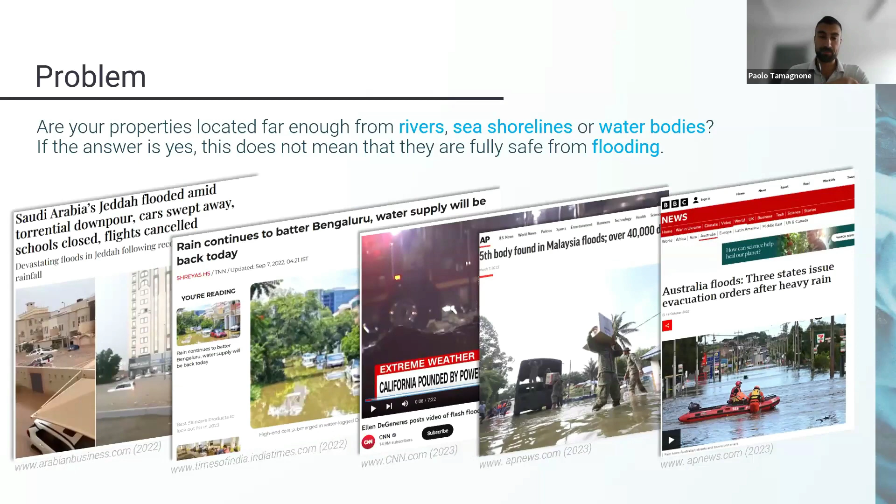I will start by presenting the first studies that we developed during a research project in Italy, where in order to investigate the impact of these meteorological extremes on the UNESCO Cultural Heritage City of Florence, the University of Florence started a project called Talete, that had the aim of protecting the cultural heritage preserved in the district of Santa Croce.

And as you probably know, the historical city center of Florence, and especially the Santa Croce district, contains two of the most important cultural heritage sites in Italy, meaning the Santa Croce Cathedral and the National Central Library of Florence, which is one of the biggest national central libraries in Europe.

But looking at the geographical location of this area, we can immediately spot that it is dangerously exposed to multiple sources of hazard. First of all, we have river flooding due to the proximity to the Arno River. Indeed, this area was strongly affected by the catastrophic flood that occurred in 1966.

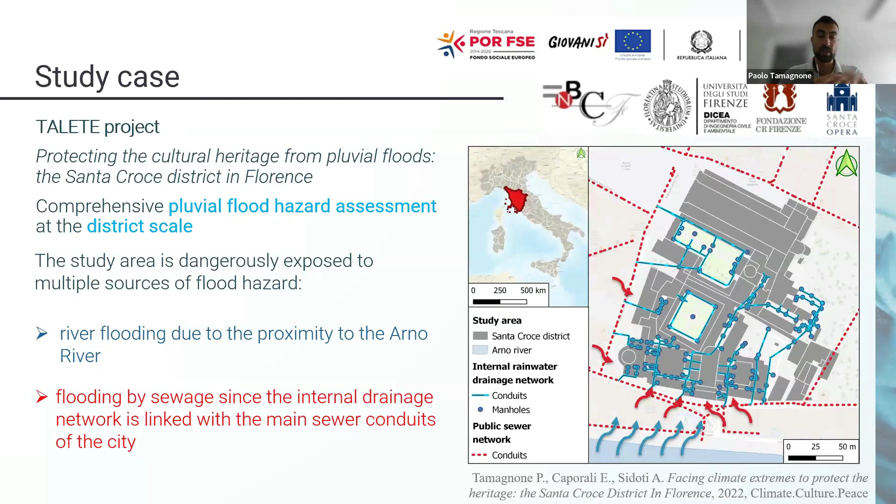And secondly, less obvious, is the hazard that lies beneath the surface, namely the overflowing of the sewer network. Indeed, the internal drainage network of the analyzed complex is directly connected to the urban public sewer system.

In order to study all these phenomena and investigate the hazard related to extreme rainfall, we exploited the potential of InfoWorks ICM, and we developed an ad hoc 1D-2D dual drainage model to provide a comprehensive evaluation of the interaction between, first, the internal drainage network, so the network of pipes draining the two buildings that I mentioned before, the National Central Library and the Monumental Complex of Santa Croce.

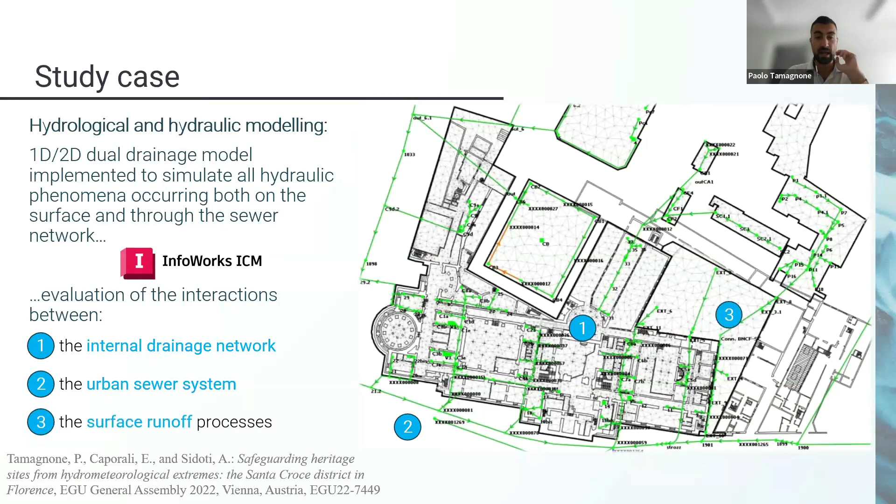Then the urban sewer system, so the public sewer system carrying, in this case, since Florence is an old city, combined water, so black water and rainwater. Considering also the surface runoff processes.

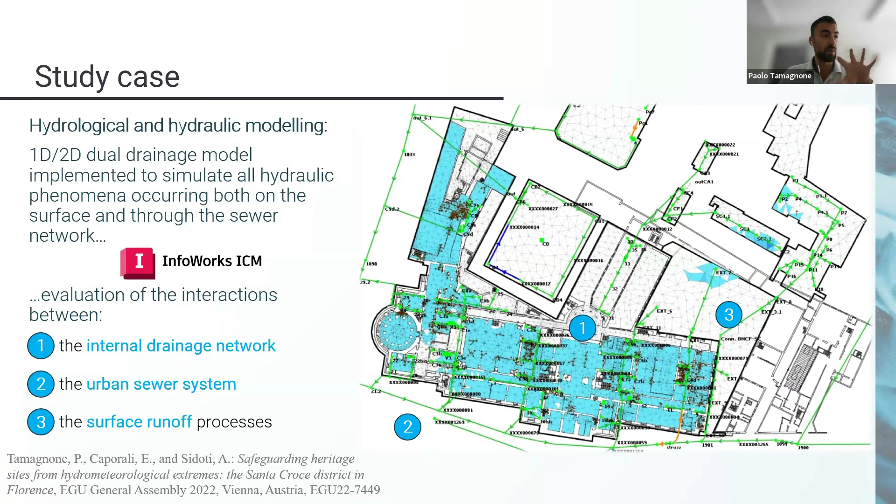So you can see the animation of the hydrodynamic simulation. We used this software to simultaneously calculate the water level and the surcharge condition in the drainage network, while the two-dimensional engine was simulating the flood propagation over the surface. And here, the scale of the analysis was really a micro scale, and we were able to evaluate the flow propagation into the building.

The results of this kind of hydrodynamic analysis have been essential to define all the critical points of the network, recognize the most vulnerable areas and spaces, and investigate the dynamics of a potential inundation, or even, for example, reconstructing what happened during the catastrophic flood of 1966.

So, having all these results and this better understanding of the hydraulic behavior of the drainage system and the topography itself, all this information allows the decision maker to propose, for example, suitable technical solutions, more than sustainable, suitable, because we are speaking about a cultural heritage site, for safeguarding the heritage and all the important assets

contained in this area. And for example, thanks to this kind of approach, we or the decision maker are able to analyze both structural or hard engineering solutions to protect some areas, or also non-structural strategies, for example, for the management of the hydraulic risk led by this pluvial flood.

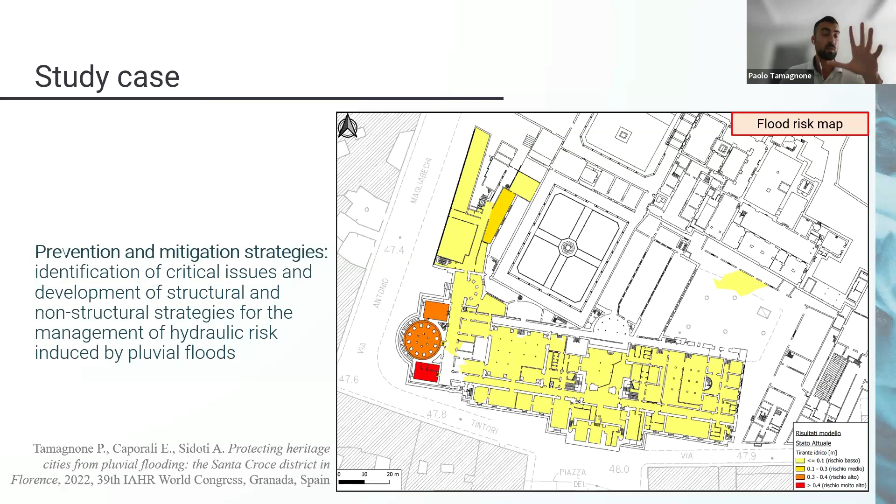So we saw a case study where the scale of the analysis was quite, let's say, small scale. We analyzed one district of one city. But if we want to have a look at what happens at the administration level, authorities, water managers, urban planners, and also engineering offices are usually interested in understanding the hydraulic behavior of their entire territory, because they are managing an entire area.

And they are really interested in knowing the impact of any modification, for example, a new building. They don't want just to know the level of risk or the exposure of that new building, but they want also to know how this new modification will impact the entire system or the entire territory.

So the challenge here can be summarized with this question: how to upscale a comprehensive analysis, in this case a comprehensive flood analysis, without sacrificing quality and precision.

Because usually in hydraulic modeling, when we are analyzing a small scale, we can introduce a lot of details. But when we want to study the problem at the larger scale, we start introducing a lot of hypotheses and simplifications. So what if we want to maintain a high level of precision in our model?

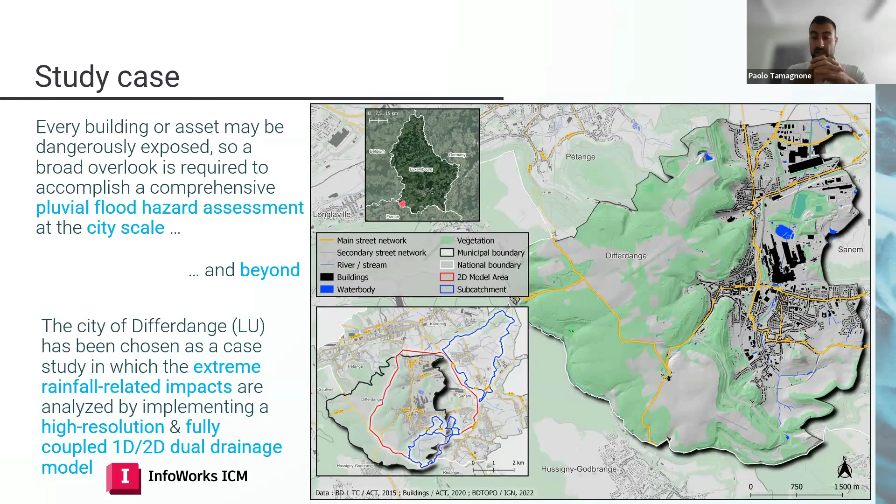But let's go through the data used in our model. We took advantage of the extensive data set of freely available geographical data in Luxembourg. Among them, we used the high resolution digital elevation model, which is publicly available at 50 centimeter resolution. That is a fundamental input to the representation of the surface.

Okay. Another high resolution informative layer is the land cover that is retrieved from the most up-to-date aerial imagery with an accuracy of 20 centimeters. This information especially allows the flood modeler to have an accurate spatial distribution of the important parameters influencing the rainfall-runoff transformation, such as the infiltration and the imperviousness degree through the territory, and also affecting the runoff propagation, meaning the roughness of the surface.

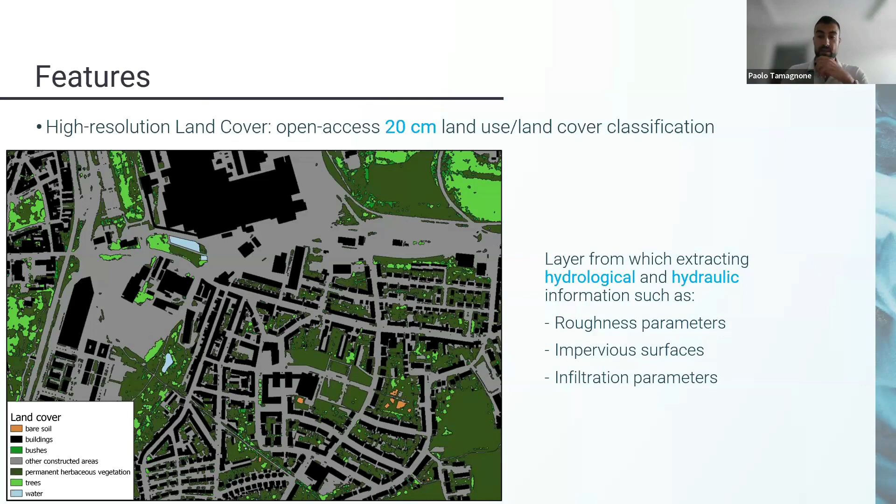Then, in order to take into account all the obstacles present in a complex urban landscape, the most up-to-date cadastral information has been used to shape the computational mesh and better represent the complex topography of the urban scape. As, for example, the footprint of the buildings, the edges of the road where the curbs are, and also we were able to force the mesh using break lines through the rivers and natural changes in the topography.

Then, since we are speaking about a dual drainage model, the essential data is the technical specification of the drainage network. And we were lucky because we got the information from the technical offices of the city, including the location, the size, elevation, material, and all the technical features belonging to the main pipeline of the city. The one that before I was calling urban sewer system.

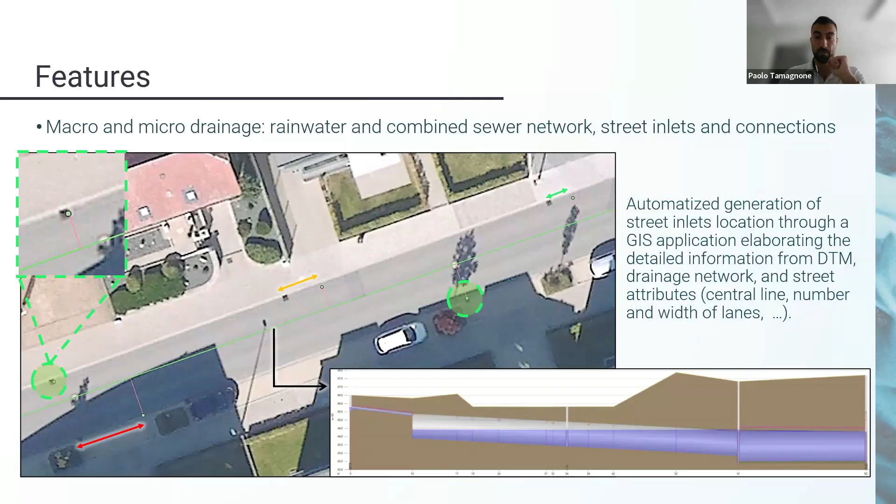So, collecting all this information together into the InfoWorks ICM environment, we built our model of the city of Differdange. And just to give you some figures about our model, we have about 9,000 nodes and pipes representing the drainage network, and about 1.3 million cells that we use to discretize the 35 square kilometers of the surface and the territory analyzed for the city.

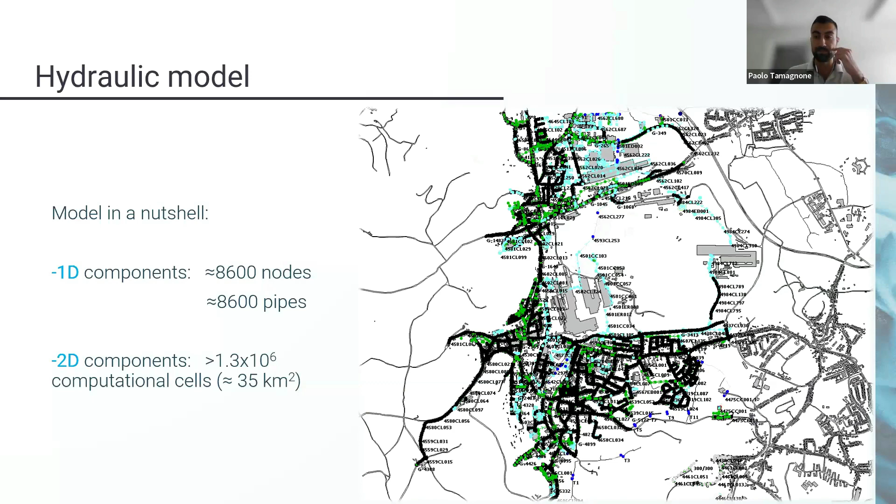Then, as is an important and fundamental step of any hydraulic and hydrological modeling, we had to test the reliability of the model. And to do that, we simulated the extreme event that occurred in June 2021, that generated catastrophic floods in Central Europe, in Belgium, Luxembourg, and Germany. And we compared the results of the simulation with the information reported by the city authorities and media.

All the reported info helped us to highlight first the problems in the implementation of the model and improve the model, and then to do this Cal/Val process. At the current stage, as you see here, the hydraulic model is able to properly represent the flow dynamics and what really happened back then in June 2021, with a slight overestimation of the flood depth of around 20 centimeters.

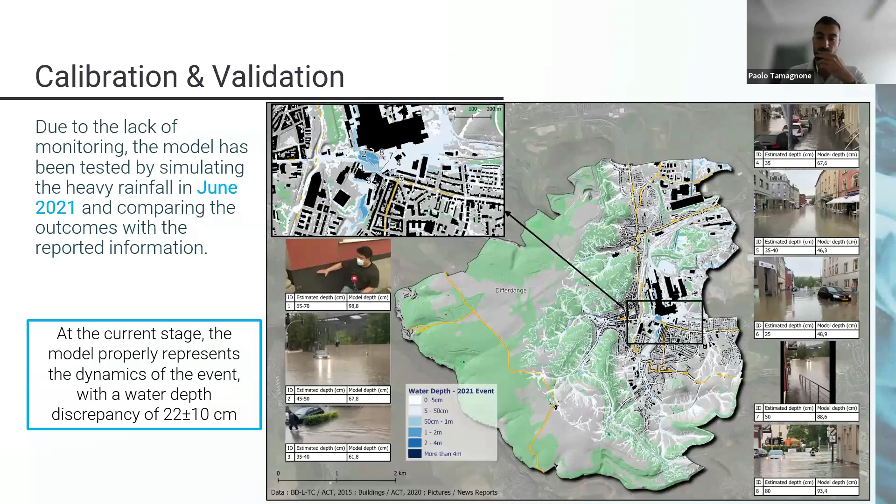Here are some outcomes of this modeling approach, and insights that we are able to extract from the model. And here, for example, we can plot simultaneously the flood propagation over the territory and see what happened even in the drainage network, looking at the surcharging status, the water level, and also where overflow occurs.

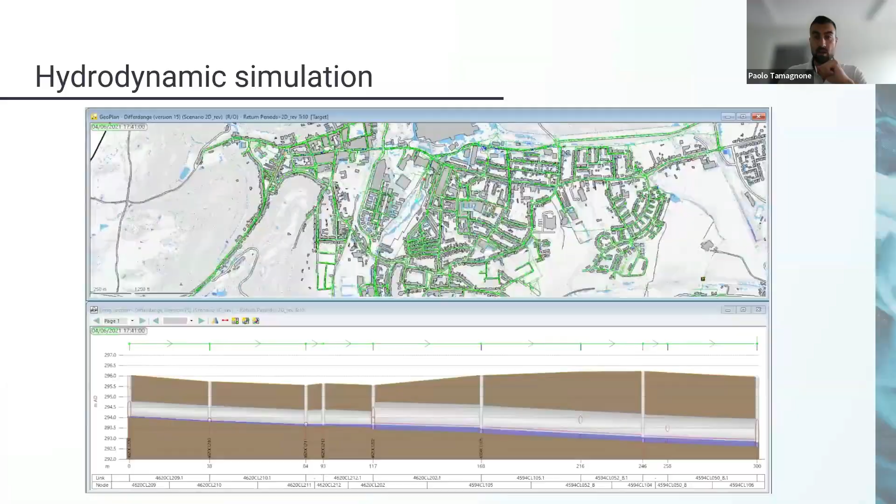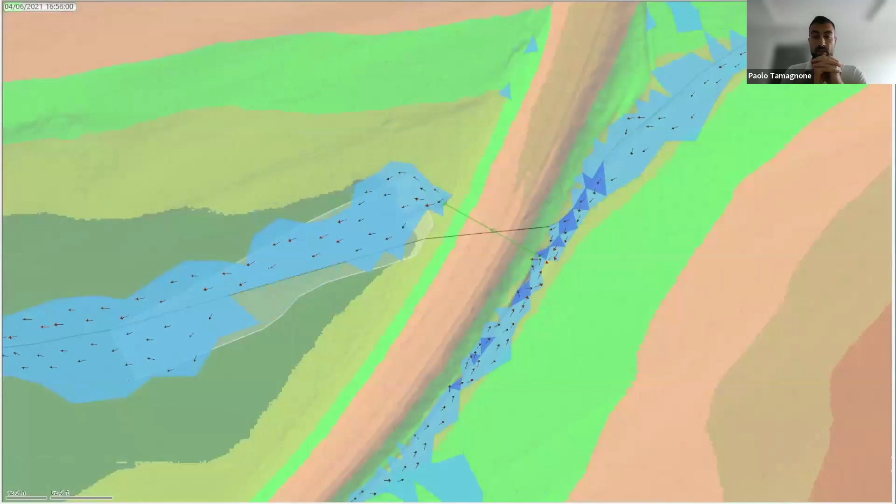And then, for example, another example why this kind of 1D-2D approach is important is when we have the presence of embankments or depressions. For example, this is a case of a highway crossing the flow path of a small stream. The simulation of the culvert is fundamental to letting the water flow from upstream to downstream, because in a simple 2D modeling approach, the water will accumulate behind the infrastructure.

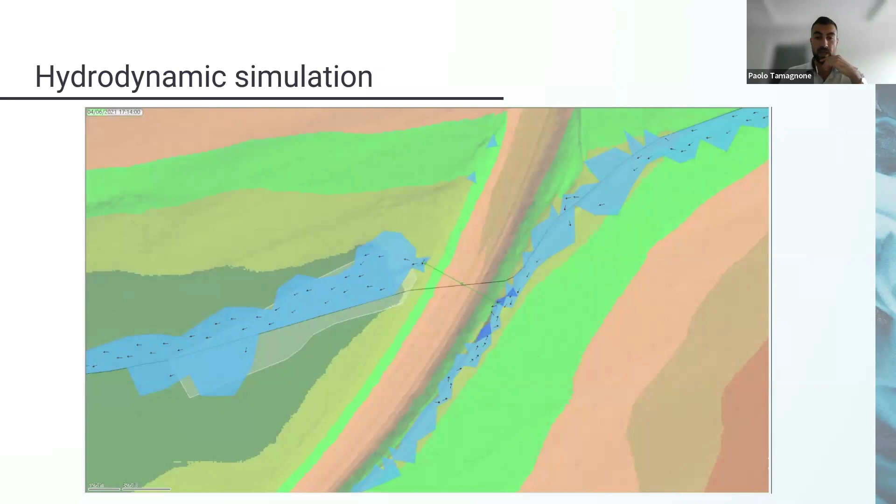And in order to avoid that, the flood modeler needs to apply a manual modification of the terrain in order to burn the DTM in correspondence of the culvert. However, we have to consider that this kind of approach will lead to an overestimation of the culvert capacity. Instead, using our dual drainage modeling approach, we can introduce the right size of the culvert, and so we can simulate properly what's happening in reality.

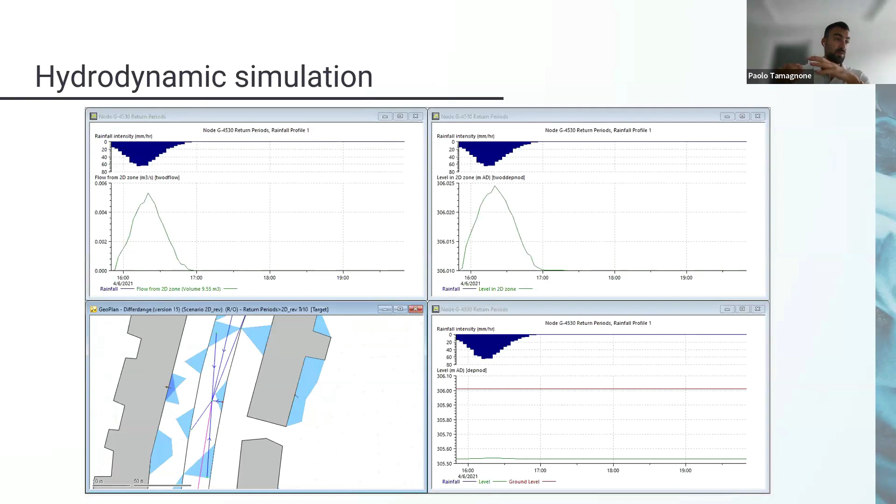Here, for example, are other insights that we are able to extract from the software. For every node, every element of the model, we are able to see and extrapolate all the variable information and also the time series, how each variable evolves in time. Here, for example, you can see for one node the inflow, so the flow coming from the surface to the drainage network, and then the level on the surface, and the level in the main node.

Another important aspect: InfoWorks ICM allows us to create comparison graphs between different scenarios and quickly and easily see the performance of two different design scenarios. So if we want to simulate different mitigation techniques, we can immediately compare the efficiency of the two, and so we can choose which is the best one.

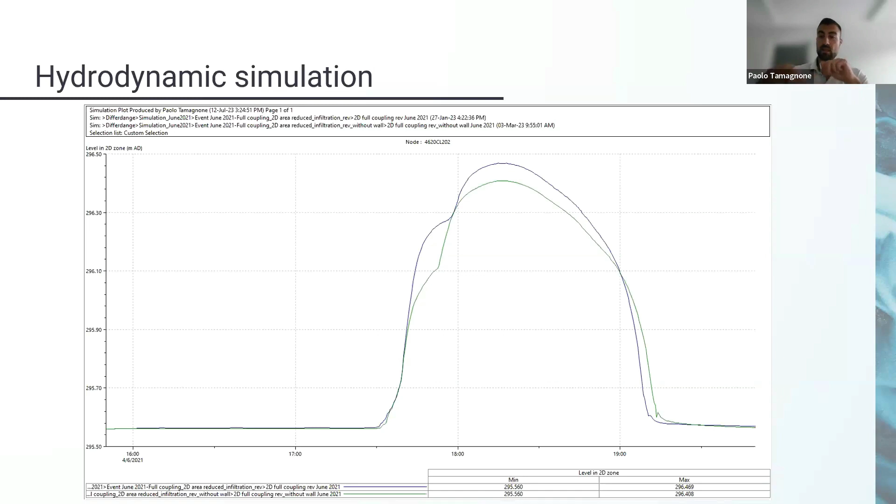But we have to consider: we highlighted the strength of using a 1D-2D approach, and as I saw from the poll, most of you are using this kind of approach. The difficulty and the effort that we need to implement such a model is very, very high. The quantity of information and the technical details are exponentially higher than a more conventional 2D surface approach.

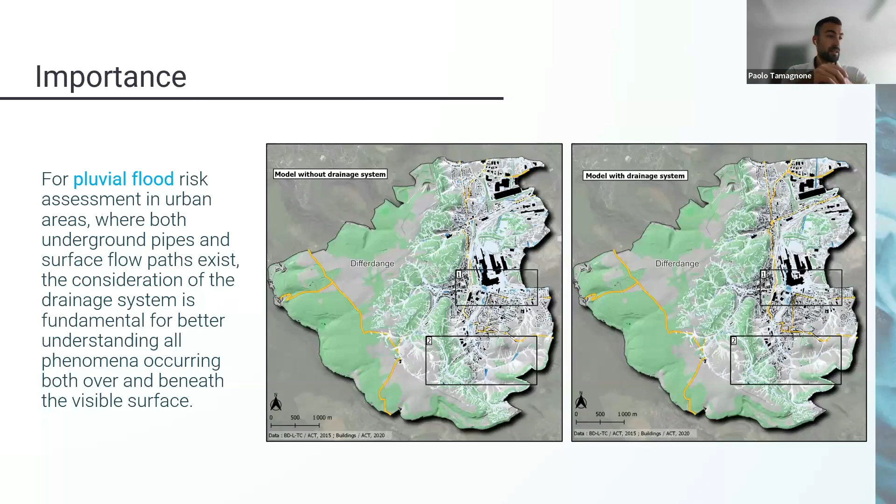So in order to evaluate the importance of considering also the drainage network, and also motivate our effort compared to a more classic 2D approach, we implemented two specular models: one dual drainage model, in which the drainage model is present, and one without. And then we decided to compare the outcomes. For example, here you can see the comparison between the outcomes for the simulation of the extreme event of 2021.

We have to say that the 2021 event was a very, very extreme event. The entire network was over capacity, surcharged at all points, because it was not able to drain all this water coming from the sky. And as we know, the sewer network is not designed to drain extreme events, but rather events with a low return period. And here we can see directly from the comparison between the two simulations the high differences in water depth, which is one of the most important variables for flood hazard.

So we have high differences when we are in presence of a functioning drainage network that is able to drain the surface, basically to suck water from the surface into the drainage network, or in the presence of infrastructure, like I was saying before, embankments or depressions that can stop the water. Indeed, for example, you can see, if I can use the pointer.

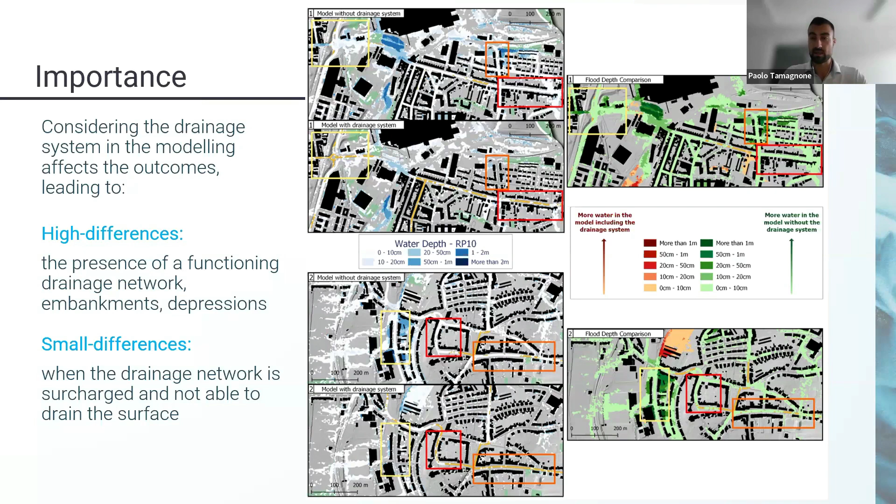And here we can see some cases where the street and the surface are drained by the system. So in the end, here I listed some considerations that are important for this kind of modeling. The implementation of this kind of detailed hydraulic model requires a vast amount of input data and a deep knowledge of the system, a vast modeling experience, I would say, and if possible, field verification.

However, the advantages are multiple, so we can motivate our effort in implementing such a model. First of all is the improved accuracy of representing complex flow paths through the complex topography of an urban landscape, meaning the flow path through streets, pipes, open air, and underground channels. Secondly, more flexibility in simulating multiple scenarios, because we can introduce modifications of the surface, so topographical modifications, but also of the elements of the drainage network.

And for example, in considering multiple scenarios, we are also able to take into account multi-hazard sources, considering also the lack of maintenance or malfunctioning of the drainage network. And then, for sure, a better understanding of the entire system behavior, avoiding some overestimation typical of the surface-only model, as we have seen in presence of infrastructure like highways or embankments, and allowing a more realistic assessment of the flood hazard, identifying critical areas and being able to design effective solutions.

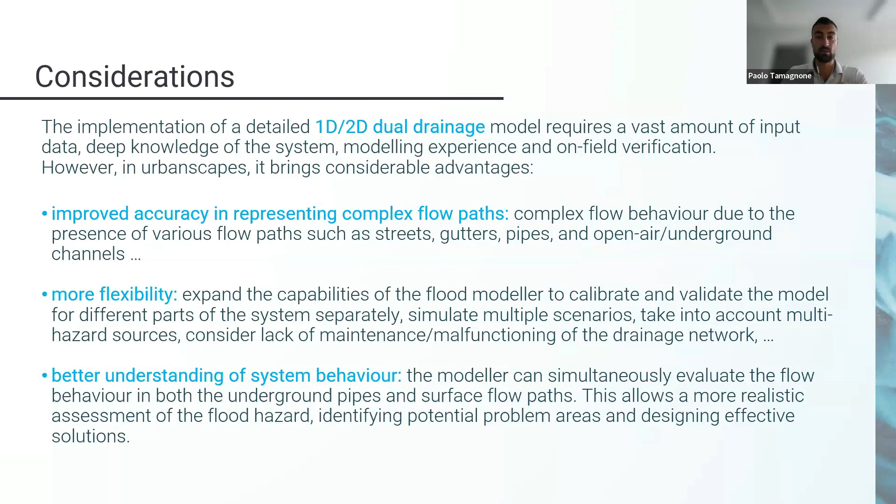Thank you. Okay, thank you really very much for that, Paolo. That was great. It was really clear, and I really loved the pictures showing the differences. It just makes it much easier to understand the impact. I hope you are now prepared for some questions. We've had quite a lot of questions there.

One thing I would like to comment on is the final poll, which is how the audience views the importance of including a drainage network. It was very high that people agreed it was important to include that. I can also add a small detail, because I'm happy that everybody chose that answer. So yes, it's important. Professionals know that the new trend in pluvial flood analysis is the consideration of the drainage network, because cities are spending millions every year maintaining and improving the drainage network. So now that we have the tools and capabilities, it's time to consider all the elements of our territory in our pluvial flood hazard studies.